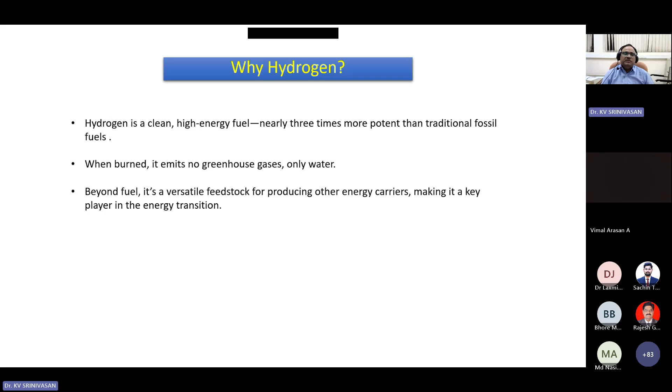But there is a catch. What is that? Hydrogen is abundant in the universe. It's the first element that came out after the Big Bang. And in fact, in any star, approximately 75% of the mass would be hydrogen, and it is found in every star in the universe.

However, the catch is that on Earth, hydrogen isn't available freely, not as hydrogen. It always gets bonded with some other element, most commonly moisture or water as H2O, or even hydrocarbons. So it is not in a pure form, it is always in a combined form. In order to use it as a fuel, since hydrogen is very rich in energy content, we need to break the bond to separate hydrogen from either H2O or the hydrocarbon.

And of course, if you want to break the bond, you always need some energy. You have to put in some energy to get that hydrogen bond broken so that you can separate hydrogen out of it. This is exactly the main point you should remember, and it is going to be the starting point of our future lectures. So it is not available in a free form, it's always bonded with some other element, and we need to break it, for which we need energy.

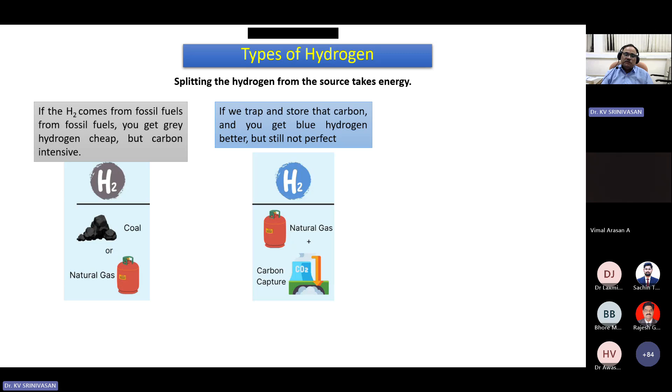Now, if I want to have high purity hydrogen, there are a few renewable energy sources, whether it's solar energy or electrolysis, where you get very high purity, what you call green hydrogen. So the topic is how to get hydrogen in green form or high purity form, so that the operation or usage of hydrogen becomes very, very easier.

Now, just for understanding, when it is said that hydrogen has a carbon content, what does it really mean? For example, if you start from natural gas, when you produce 1 kg of hydrogen, it comes along with 9 kg of CO2. The carbon intensity is quite high. Through various processes, we produce 9 kg of CO2 per 1 kg of hydrogen.

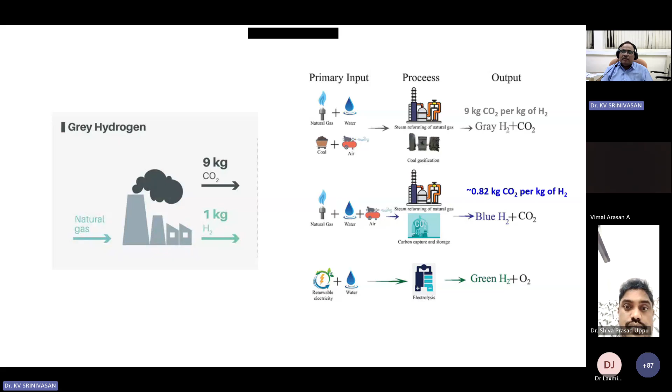So we call it gray hydrogen, which has very high content of carbon dioxide. Now we go for blue hydrogen, where a carbon capture methodology is used, so most of this carbon dioxide gets absorbed or removed, but it still has about 0.8 kg of CO2 per kg of hydrogen produced. And then of course, green hydrogen has obviously about 99, or better than 99.7 purity. So this is the whole objective.

You may also wonder, it doesn't stop with gray, blue, or green — several other colors exist too. I'm not going to spend time on that. Basically, you get varying purity between blue or gray depending on the methodology used to produce it. For example, methane pyrolysis gives you turquoise hydrogen. Coal gasification gives you brown hydrogen. So these are all colors describing how much carbon content there is and by which process you got that source of hydrogen.

So this is what we think, but the sum and substance is what is the cost involved in achieving higher purity. Without that, it's not going to be of much use to us. The current technology we have to produce high purity or green hydrogen — the cost per kg is still not comparable to traditional fuel.

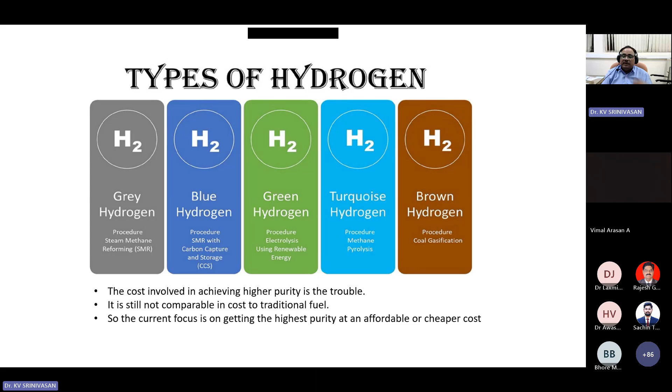If you are making an energy source or vehicle running on hydrogen, and the cost is many folds higher than petrol, obviously people will not move towards green hydrogen unless the cost becomes comparable. So the current focus is to get very high purity at an affordable, cheaper cost. Let's see in further slides to get a feel of what we mean by this cost and purity.

India's renewable energy capacity in the last 10 years has grown threefold, from 77.37 gigawatts to about 220-230 gigawatts in 2025, over a decade. This is going to further increase as we move towards more automatic vehicles or other processes shifting in that direction, requiring more energy. So the point is to reduce carbon content, since you can't stop energy consumption — it will keep going higher and higher.

The challenge is to make green hydrogen much more affordable. The current cost is about $4 per kg. The methodology or process — the whole world is trying to bring it below $2, which is equivalent to our petrol cost of about 100 rupees per liter or so. But it's very challenging, so we will put some kind of in-between benchmark to compete globally.

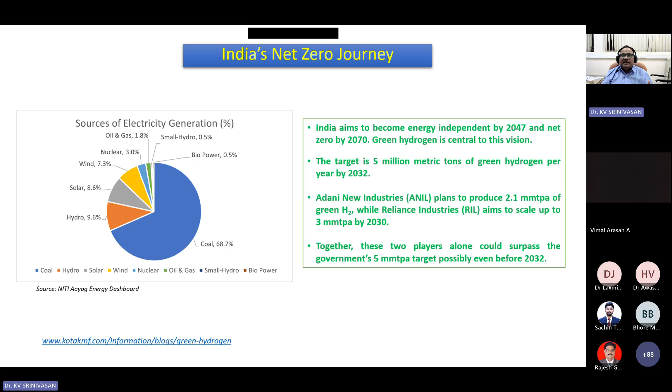So there are a lot of challenges, and how do we go about it? Now, when we look at various applications of green hydrogen, what is actually happening, existing, or proposed? In Germany, hydrogen-powered trains are already replacing diesel. The entire Tokyo Olympic Village was using green energy. Airbus is planning a zero-emission aircraft using hydrogen, and a British startup has already come up with a prototype flight powered by hydrogen.

Hydrogen-powered cars are already in the market. In the Indian perspective, we have pilot hydrogen buses already running, and we have a very large ambitious project of hydrogen-powered trains, which are ready to launch and have been successfully tested at ICF Chennai. It's going to be a very large, 12,000 HP powered train, which uses a different technology - we'll see that.

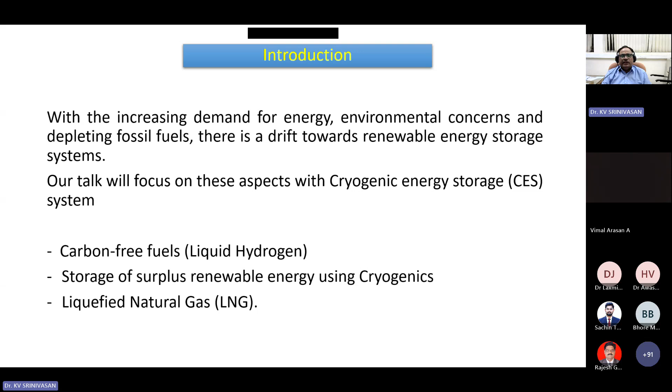I'm going to touch upon LNG because that's the starting point of the whole shift towards liquid hydrogen or green hydrogen. These are some of the things we are going to see.

Before I move to cryogenics, let's discuss temperature. Temperature can be measured in degrees Celsius or Fahrenheit, and there's also degree Rankine. But in cryogenics, we always use the Kelvin scale, which is an absolute version of Celsius. Whatever the degree Celsius is, you add 273.15 to get the Kelvin value. For example, 27 degrees Celsius is 300 K, which is a typical room temperature.

The conversion can happen between various units, from Kelvin to Celsius to Rankine or Fahrenheit. There's a conversion factor for this. In cryogenics, we always use the Kelvin scale for measurement.

Cryogenics deals with the production and effects of very low temperature. It's a very special subject that comes under both physics and engineering, hand in hand.

To emphasize cryogenics and the temperature scale, let's look at higher temperatures. We know that at 100 degrees Celsius water boils, at 0 degrees Celsius water freezes, and typical normal body temperature is 37 degrees Celsius.

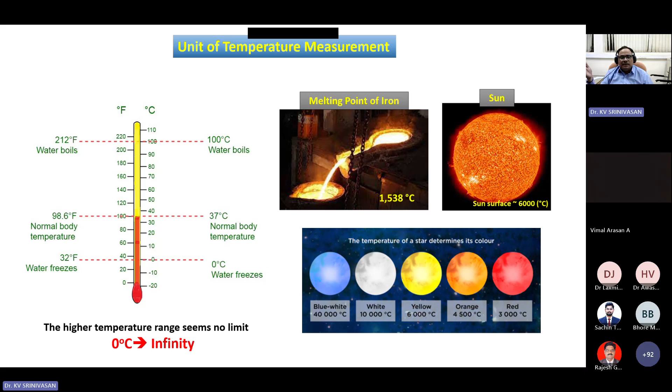There are certain stars whose temperatures are more than 40,000 degrees Celsius. Beyond a certain value, we measure temperature in terms of color rather than direct measurement. So starting from 0 degrees Celsius where water freezes, on the higher side it almost reaches infinity—there are stars with temperatures of 10 to the power 9 degrees Celsius. It's essentially an infinite scale on the higher end.

Now let's see what happens below 0 degrees Celsius. Starting from the freezing point of water and reducing temperature, it goes down to minus 273.15 and ceases—there is nothing below that. So on one side we see 0 to infinity on the higher end, and on the other end we get 0 to 273, which is very insignificant compared to the higher end. Yet a lot of property changes happen within this insignificant band of 273 K compared to infinite K.

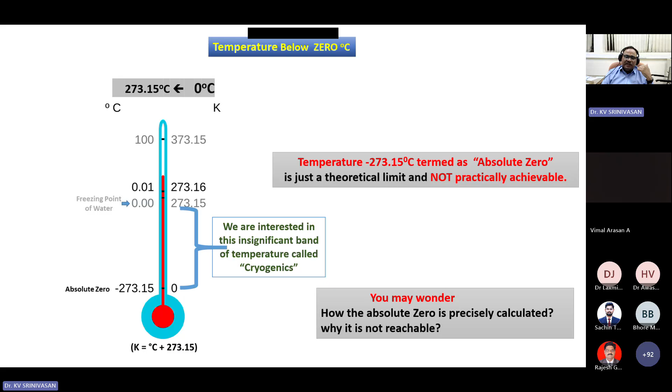We are interested in this insignificant band of temperature, which is what we call cryogenic. The absolute zero is the limit—nothing exists below that, and this is only a theoretical limit. In fact, you cannot practically achieve this temperature of minus 273. It has been very precisely found, but you can't go below it. So we may wonder, since it's been precisely found, why is it not reachable?

Let's go slightly into the physics to understand what's happening. We know various gas laws exist—Boyle's law, Charles' law, Avogadro's law, which we must have studied in thermodynamics. Charles' law says that V by T is constant: as temperature reduces, the volume of gas reduces. So as temperature keeps reducing, volume keeps reducing. If we simply extrapolate Charles' law, we see that the temperature scale reaches about minus 273.15—many digits have been precisely found for this. This is what we call absolute zero.

The reason why this is a theoretical limit and cannot be practically achieved is that when we are reducing the temperature of a gas, it becomes more and more dense. As the temperature keeps reducing to very, very low temperatures, we go to a quantum level, which is not a multi-element, it's a few atoms. So few atoms are cooled lower and lower, and at this temperature, assume you need one atom.

Even if one atom is cooled below a certain level, at this temperature we see that the molar volume becomes zero. So the volume of the gas becomes zero at this temperature, but we are cooling the gas or cooling an atom. So the molar volume of an atom has to be considered for your calculation. It cannot be ignored. So it's a very simple, provable reason: since the molar volume has to be taken into account, absolute zero is the theoretical limit and cannot be reached.

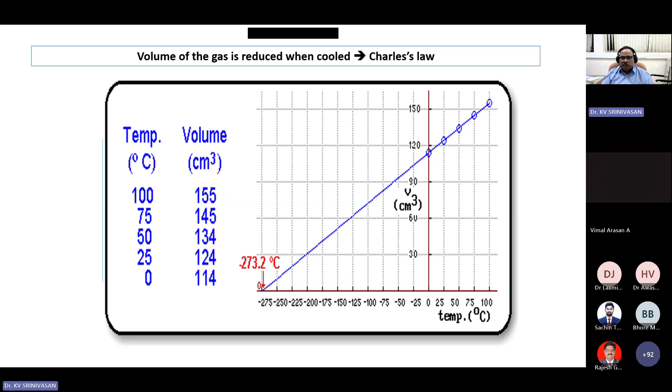People have tried to go as close as possible; 10 to the power of minus 12 Kelvin has been done, but of course that is with a few atoms of a particular material, so not below that. So this is a theoretical limit, we cannot go beyond it. Now we know the basic background of cryogenics. How do we achieve the cryogenic temperature?

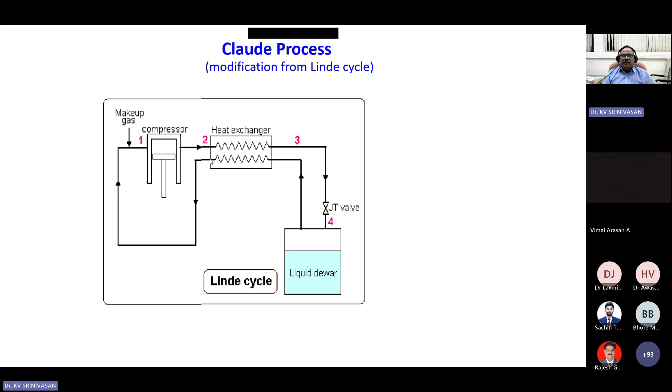The next cycle is the Claude cycle, which is a modification of the Linde cycle to increase the efficiency, because the Joule-Thomson expansion is an irreversible process. We know in thermodynamics that irreversible flow has very low efficiency. When talking about an operational plant, we have to consider the energy consumption or energy efficiency of the cycle. So we add an isentropic expansion process. The high pressure gas is expanded in an expander, and the low pressure, low temperature gas is put back to cool the incoming heat exchanger.

So we put multiple heat exchangers. The gas that comes here gets cooled by the expander, then further cooled by the evaporated gas, and finally liquefied. We may add more expanders, 1, 2, 3, and more heat exchangers, so that you reduce the temperature as much as possible, and the final Joule-Thomson expansion produces cooling. In this way all gases can be liquefied, and in fact all commercial cryogenic plants work with this combination of isentropic expansion and isenthalpic expansion for producing low temperature.

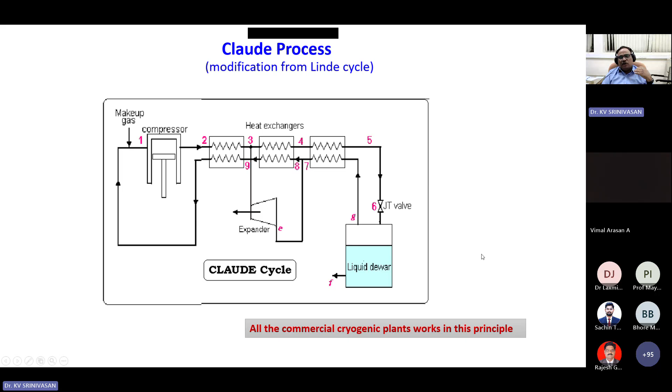Having known this, let us jump into our subject of liquid hydrogen, liquid air and liquefied natural gas. Liquid hydrogen is a cryogenic fluid because at atmospheric pressure its boiling point is minus 252 degrees Celsius, about 20 Kelvin. And its density is only 70 grams per liter, so a very, very light fluid.

If 1 liter of liquid hydrogen is allowed to evaporate at atmospheric pressure, it is equivalent to 848 liters of gas. So you see how much the density increases when you reduce the temperature. 1 liter of liquid will expand to 848 liters of hydrogen gas.

Same with air, which liquefies at minus 194 degrees Celsius, about 79 K. And this has a density of 870 grams per liter, roughly about water, which is 1000 grams per liter. It's almost close to water, a much denser fluid. And again, 1 liter of liquid air, when it evaporates, we get about 760 liters of gas.

So put it another way: if you have a 1 liter vessel and we put some liquid air or liquid hydrogen or whatever in it, when you close it and heat it from outside, the pressure builds up. Since it is not going out, the pressure build-up is going to be 760 times. So 1 liter of liquid air at atmospheric pressure, when you evaporate it by adding heat while the vessel is closed, the pressure of this vessel will go to 760 times the atmospheric pressure. So we said every cryogenic system is like a potential bomb, it's much worse than a bomb.

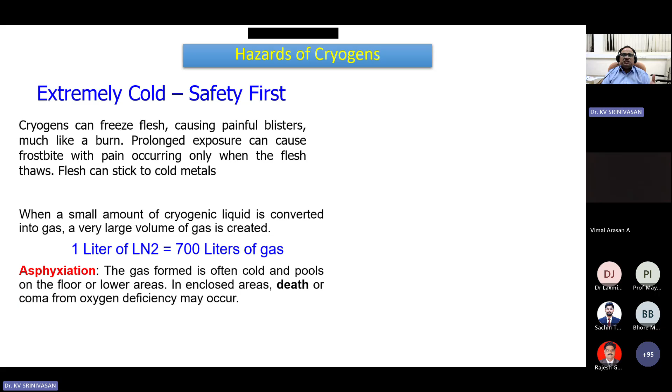So whenever we talk of cryogens or very low temperature, there is a safety concern to it. It's very cold. In fact, it's much worse than hot oil. It can freeze your flesh, freeze your skin, and prolonged contact with any of these cryogenic fluids will become a painful blister, because when the low temperature fluid comes in contact with your body, it locally numbs your sense nerves, and when it becomes warm after some time, it gives blisters.

And of course, when nitrogen or oxygen or hydrogen expands, it condenses the oxygen around, and then you feel a situation where you cannot breathe, because the oxygen in the atmosphere gets condensed by that very low temperature fluid whenever it is spilled out. So you have to be careful about how you quickly get that area cleared with fresh air. Of course, when you are handling it, you have to use a lot of personal protective equipment to save yourself and the persons who are working there. So that's the background of cryogenics and the cryogenic safety part.

Now coming back to our core subject of hydrogen as a fuel. Now we go in detail. When we say it is 3 times more powerful: petrol has an energy content of 44 megajoules per kilogram, whereas hydrogen has 120 megajoules. Okay, so it has a very high energy content. This can be used as a fuel for many applications, which we are going to see. The normal internal combustion engine can be converted into a hydrogen combustion engine, or you can use that hydrogen in a fuel cell and a fuel cell powered engine. Of course, the rocket is another special application. We stick to these things. And of course, we know that there's no harmful emission when you use hydrogen.

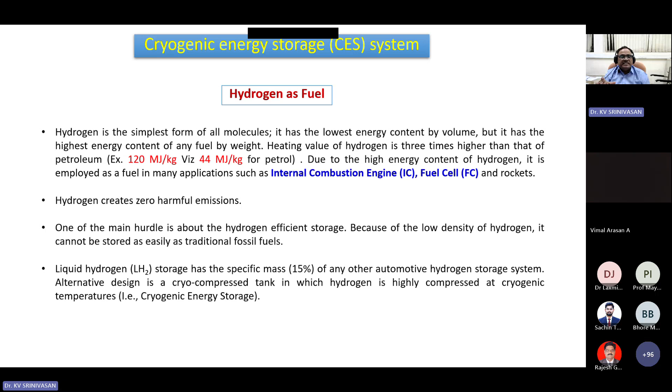If the pressure for compressing the gas is so high, it's very difficult, and liquid hydrogen is okay, but it's not much in specific mass. To combine these two, keep it in liquid hydrogen form and store it at a very high pressure, not as high as compressed gas. So the combination of high pressure cryogenic fluid is also one of the options for how we store the hydrogen, because that's very, very essential.

Over the production, how do we extract hydrogen? As you say, the simplest thing is natural gas, which is much cheaper and quickly we can get, because of the CNG gas. Along with that, gray hydrogen is possible, and is very cheap, but it's not as pure for certain things. And we also have hydrogen production from biomass gasification, which is a very promising area. Very high purity hydrogen is possible, but still it is not as high purity as green hydrogen; it is somewhere between the blue and turquoise.

So many of these challenges are happening: how do we increase the purity from waste biomass? Because in many city environments, the biomass collected can quickly become a plant for producing hydrogen, whereas CNG will have to be imported, or it's in the oil rig, so it's far off. So if hydrogen production comes within every city, biomass is a quick option.

And there are various other methodologies like ammonia, which has a high percent of hydrogen, again challenging in separating. In fact, cellulose-based sources can also be used for producing hydrogen, and from methane, various methodologies are there. Maybe the further speakers will cover them.

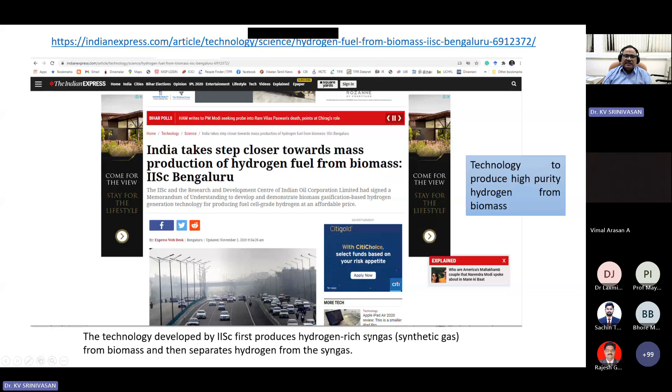So the technology to produce high purity hydrogen has already been seen. It's from 2020. The prototype models are now in process. So it converts biomass to somewhat blue hydrogen, then we make a hydrogen-rich synthetic gas, and pure hydrogen is separated from the synthetic gas. That is the technique.

The other very promising area, which is going to happen much faster, is the internal combustion engine. We already have all the fuel-powered engines available, normal internal combustion engines using gasoline, and diesel ones. So if I replace the fuel from gasoline to hydrogen, can I use it as an internal combustion engine? Yes, it is possible. Of course, slight modification has to happen, but we will see in the next slide what kind of changes can be done.

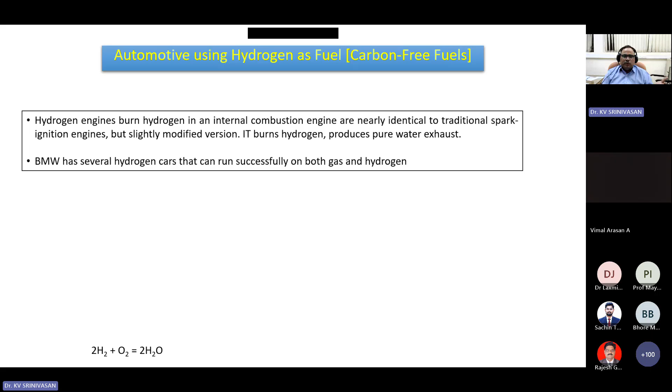Is there any possibility, without any change, just changing the carburetor supply from petrol to hydrogen, to produce power? Yes, it is possible. A hydrogen engine burns in internal combustion nearly identically to spark plug ignition, with slight modification. Let us see. It's a typical IC engine where gasoline comes in with a spark plug. Everything remains the same, and you change the fuel supply from gasoline to hydrogen, in terms of a high pressure gaseous hydrogen spray.

So hydrogen plus oxygen, which comes from the carburetor air, in the traditional way produces high combustion power that can be utilized to drive the piston, and the exhaust is H2O, a very green emission.

If you have that kind of system available, we can carry liquid hydrogen, high pressure gas hydrogen, or combined hydrogen gas with us, evaporate it, and connect it to the fuel line, like multi-point fuel injection. Everything remains the same, just change from the petrol tank to the hydrogen tank and things are done. How is this possible? It's a simple diagram.

So basically, when you are using gasoline vapor, we know that the opening of the inlet and exhaust valves is based on the valve timing diagram. People who know automobile engineering will know about the valve timing diagram, the sequence of which valve opens, whether the inlet is open, exhaust is open, or both are closed.

So assume a typical petrol powered engine of roughly 1000 cc, 983 cc total. If we put about 10% fuel and 90% air and combust it, we'll get about 3.5 kilojoules of combustion power, which will drive the vehicle. For a moment, we take that 3.5 as 100%.

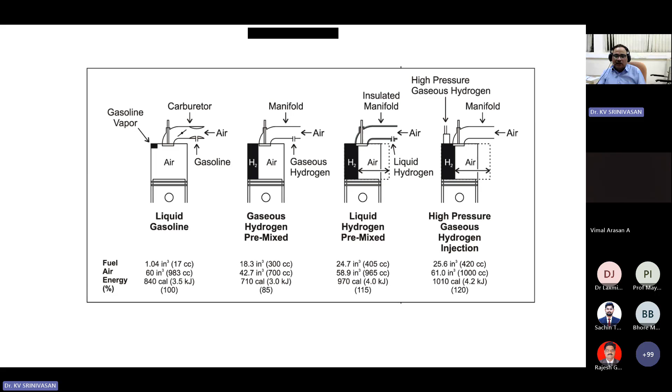This is what is happening, and people are quickly changing. If we know the diagram, by changing the valve timing diagram we can change existing powered vehicles. This is what Godrej and Tata are doing. So this is one very promising area which can quickly take off the moment we get high purity hydrogen. For all changes, you need high purity hydrogen.

So getting hydrogen is the main hurdle rather than the solution. Reasonably good solutions are already available, but we are stuck with high purity at affordable cost. That you should remember.

Now we go to the next type of vehicle, the fuel cell based vehicle, which we can also quickly change over to. India in principle has decided from 2030 not to produce any petrol or diesel powered engines. I don't have a reference, this is what I heard and understood, so please cross check, don't take it as certain.

So from 2030 no more petrol and diesel engines are going to be produced. So we should go for electric-based vehicles, which are already in the market. You just go in full swing.

Now at the same time, the hydrogen fuel cell is also coming up. If hydrogen becomes more affordable, what do we do with the electric vehicles? So this combination of electric and hydrogen is the hybrid. This is going to be the future very soon. So how the hydrogen fuel cell works, many experts are going to say in further talks. I'll just give some overview.

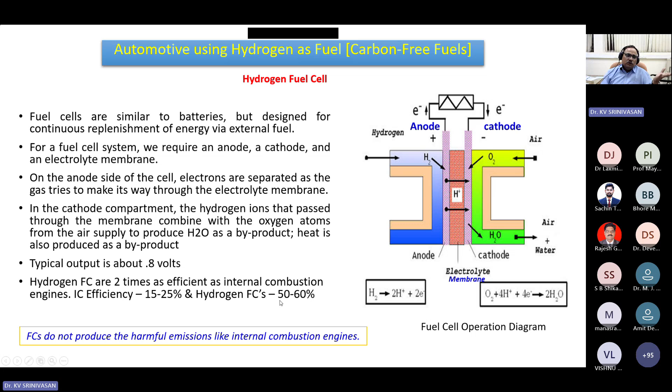Okay. Now, this fuel cell based vehicle cannot have enough voltage from one cell. So the challenge is to have the proper voltage to run a vehicle. You add a stack of fuel cells, and there's a centralized path where fuel goes in to all the cells, and the air comes in from the other chamber to all of them, and each cell produces electrical current. You take it out combined.

Okay. So now about the membrane, of course, I'm not going to say much about it. Many fuel cell people are going to mention that. Different types of membranes are available, alkaline-based or the proton exchange membrane, which is like a polymer. These technologies are much more advanced, while everything else remains the same. Whether you get the best output, whether after some point of time the membrane has to be changed, how quickly you can produce this electron voltage, or how long it can stay intact, these are the challenges.

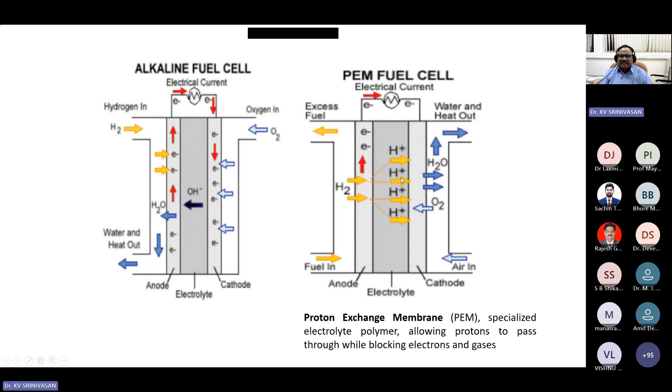There are many types of fuel cells available. I just show them for the sake of it, I'm not going to spend time on that. What is the typical storage technology you use? Conventionally, you can store it as a liquid or as a compressed gas. Then it's not only there.

If it becomes very low temperature, it's not possible. If it is very high pressure, it's not possible. Then you also have a solid state material where hydrogen, like a sponge, when hydrogen comes in, all the hydrogen gets absorbed in the sponge and it can release as and when required. So the storage technology can be of many modes. It's not only traditional liquid or gas, it can also be a solid state material, various materials at low temperature. This can happen at room temperature, at a very elevated condition, or at higher temperature it can happen at low temperature. So all combinations possibly exist.

Speakers will mention about that.

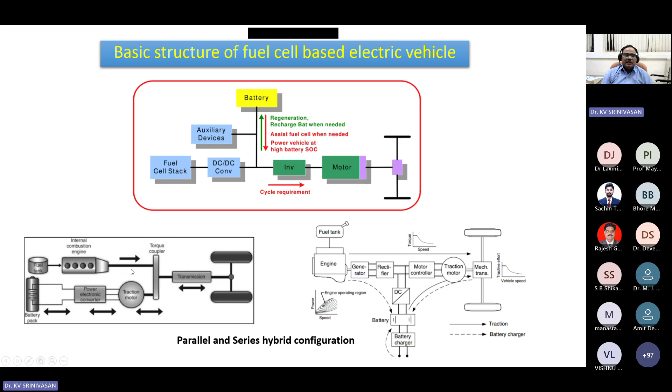So whenever there is a fuel cell, the hydrogen problem is sorted out. All hydrogen electric vehicles, by adding this fuel cell based portion, can go directly into a hybrid vehicle. This is what is going to happen in future.

So in a typical fuel cell vehicle, you need to have electrical propulsion, which is a known thing. You need to have fuel cell technology and hydrogen storage. As of now, looking at hydrogen fuel cell based vehicles, of course the batteries are still there, so the battery can be charged externally or from here, so conversion becomes easier.

I was mentioning about the challenges in hydrogen storage. I was talking about high pressure. When you're looking at highly compressed hydrogen gas, you should compress from 35 megapascal to 70 megapascal, sometimes 350 to 700 atmospheric pressure. Huge pressure, unimaginably high at room temperature. If you want to make such high pressure, typically you must have seen the LPG gas cylinder at home, it's about 3.5 atmospheric pressure. If you go to a gaseous cylinder in the laboratory, you may get about 150 to 200 bar. But 350 to 700 bar at room temperature is very high.

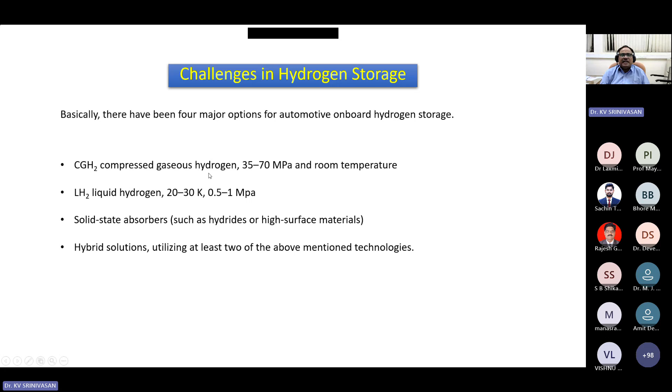Of course, if you want to go with liquid hydrogen, you can go to about 10 bar. Then you can have a hybrid solution of high pressure and low temperature, and the high pressure combination will take care of these things. So both options are available for the tank pressure.

So we are already making, there are market available composite fiber based wrapped cylinders. It's not a typical metal cylinder. A metal wire mesh over the carbon fiber, many such layers, such construction. We make the thing. Compressed hydrogen goes up to 340 to 700 bar.

For example, if you have typically about 186 liter water volume capacity, and store it with about 340 bar of hydrogen gas at room atmospheric ambient temperature, we can have about a 500-kilometer range with a fuel cell based vehicle. So it's not just about the 500-kilometer range, it's about how safe we can do it, how quickly. When you have the storage, how do you test it, how do you ensure it is leak tight, because it's going to sit in a vehicle, which is a very safety concern for the people traveling with that. If anything is to happen, how do we take care of this? So this has to be addressed.

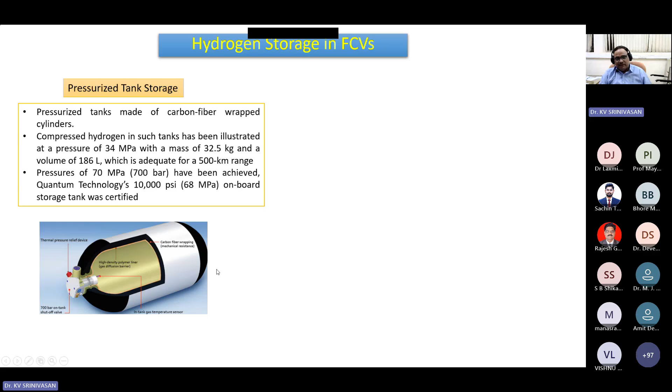Now if we want to have a liquid cryogenic based tank, we don't need to have as much pressure, because we can go slightly higher pressure, still affordable, and still match this requirement with a cryogenic fluid. So maintaining liquid hydrogen becomes very explosive when it comes in contact with oxygen or similar substances.

When you have a liquid hydrogen tank, before filling you have to be extremely cautious to clean the cylinder, purge the cylinder with so many gases before refilling. All the pipeline which is connected should not be exposed. So these are the challenges which we need to address.

Of course, these have all been well proven and already done. For example, a tank has a multi-layer insulated design with many layers of radiation shielding to reduce the boil off of the hydrogen at high pressure. Then liquid hydrogen is poured here, and you take the hydrogen or liquid hydrogen or hydrogen gas, depending upon the technology being used.

And how do you make the cylinder, how do you fix it so that the wall manifolds are accessible and the filling holes are at the front? When you make the filling holes, the valve and other connections should be standardized so that the location where you refill has the matching adapter, which is already been done.

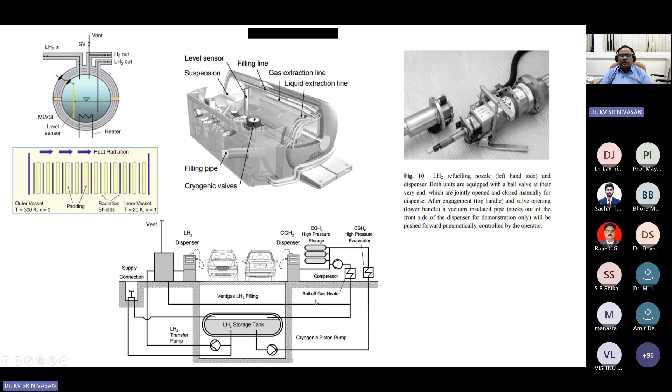Like you have a petrol pump, with a liquid hydrogen pump it pushes the liquid through the vessel and dispenser and gets stored into the system. In case some gases use only compressed gas, you take the gas, compress the liquid, evaporate, compress, and put it back. So whether it's liquid or gas, all the things are possible.

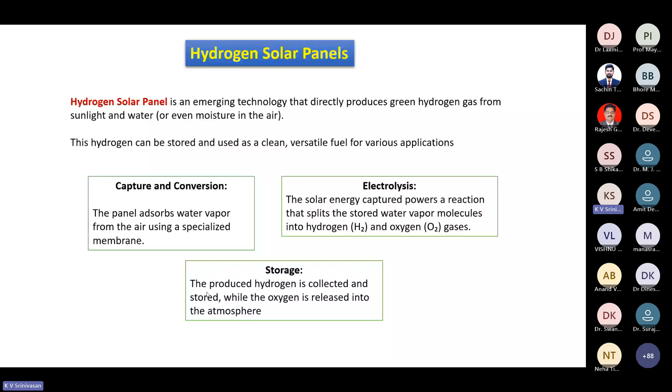The panel will adsorb water vapor from the air using a specialized membrane at night, then do the electrolysis process, splitting the water molecule into hydrogen and oxygen. Both hydrogen and oxygen can be used separately, captured and stored, or the oxygen can be released into the atmosphere. All these combinations are possible to produce clean green hydrogen using an existing photovoltaic cell.

There are two separate methods. One is photovoltaic electrochemical water splitting, which generates electrolysis as I explained. The other is photo-electrochemical cells, which use photocatalysis, where the solar cell itself has a special membrane that, when exposed to sunlight directly, triggers a chemical reaction, splitting the stored water molecules to release energy.

Basically, like a water sponge, it collects water molecules at night, and during the daytime it gives out the photoelectric current. Whatever current is produced from the normal solar cell will be used for producing hydrogen in addition to normal power. So these are two separate processes, and both are upcoming, with some already installed.

Each panel can produce up to 12 kgs of hydrogen, depending on the size. For a typical standard panel size of 2 feet by 6 feet, this will give 12 kgs of hydrogen in addition to the electrical power.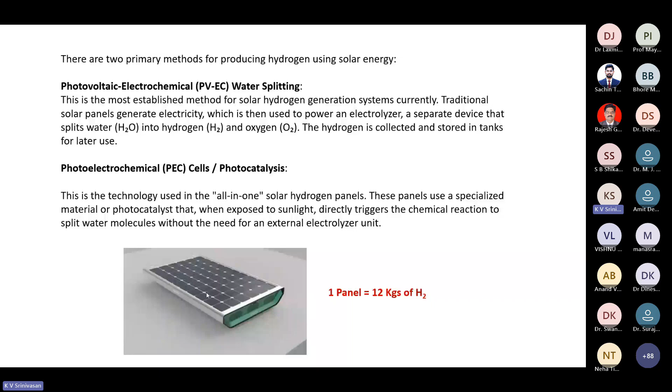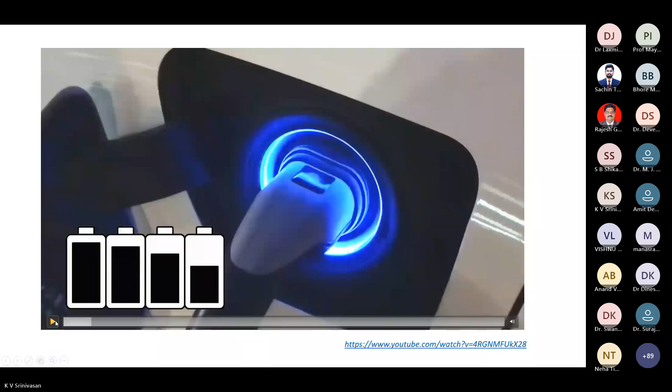Okay, so I have a small video about that. Can you hear the sound also? Sir, we can see the video but not the sound. No? Okay, then I will tell them. Is it audible now? Okay, just watch the video, pause it.

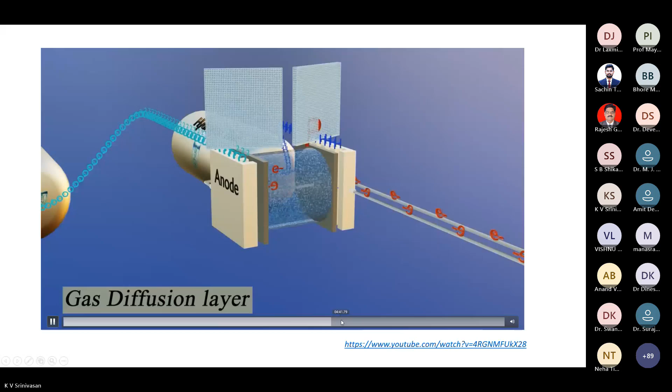Sir, right now we can't hear the audio. Okay, some of the things are written, I can use that. You can move ahead, and at the end of the session probably you can see it.

So now going back to the basic substance in the video: you have the material which can absorb moisture, and with the electrolysis process, for which you need power stored during the daytime, it is used for separating the hydrogen. So basically the combination of the electrolysis process and the solar cell is what this hydrogen solar cell is.

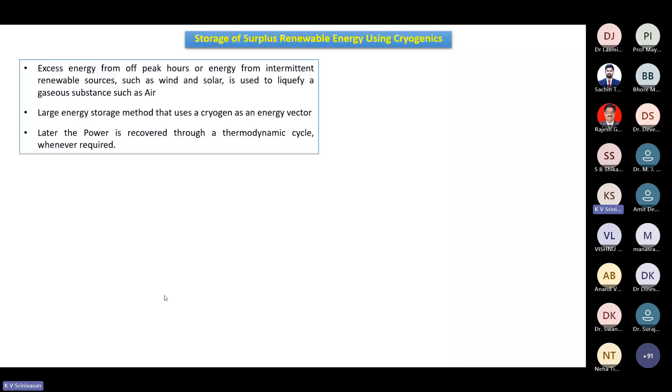Now coming back to surplus energy release, moving a bit away from hydrogen, but it's also very clean energy. We have a lot of windmills, thermal power plants, nuclear power plants. Once you start these plants, it's very difficult to stop them, and it takes a lot of precaution to do that.

So when there is a change in the requirement pattern of electrical power, for example in the winter season, consumption reduces a bit here in India, but the windmills and thermal power plants still have to keep running.

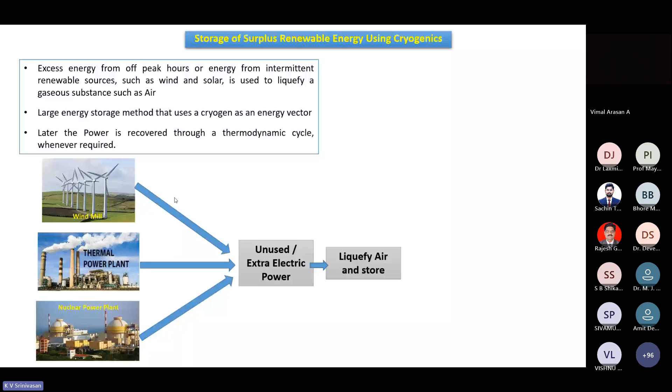But if there is a mechanism to use that atmospheric air in a liquid form and store it in the liquid form, and then whenever it is required, when the load is getting higher, you use the liquid air, evaporate the liquid air, and we have already seen 1 liter of liquid air will go to 760 times the gaseous content. So this high pressure gas will run the turbine the way it does in a thermal power plant or nuclear power plant where the steam is running.

In the same place, instead of steam, that high pressure nitrogen will run the turbine and the electric current can be produced. So whatever electrical power has been unused from the extra sources gets captured in a liquid form and reused whenever the demand is more. So this process of charging, storing, and discharging is what we call a liquid air energy storage system, LAES.

So it means that if we store it and then reuse it, we can get up to even 65 to 75% of the power which otherwise would have gone waste because it has been unutilized. So with a round trip efficiency of even 65 to 75%, you can keep that high pressure store.

So I have a small video where a small bottle is filled with liquid nitrogen. We have made some nozzles tangentially. Again, don't worry about the sound. Just see that thing.

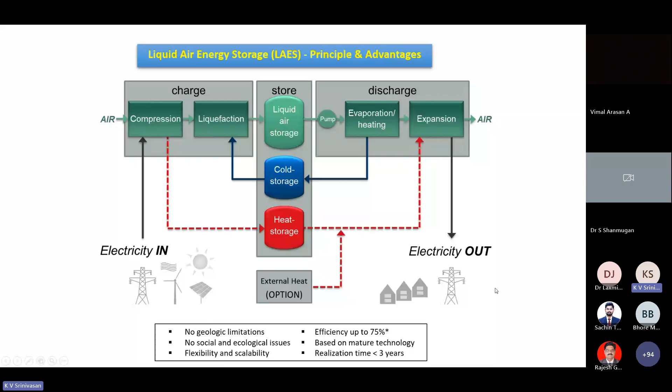So where you can put this: whenever oxygen and nitrogen are separated, you can store the nitrogen, or oxygen can be used for the combustion process. Nitrogen can go into fertilizer projects. When there is a nuclear power plant, excess electricity can be used to liquefy the air, and then the liquid nitrogen industry. So these are various areas where you can do it.

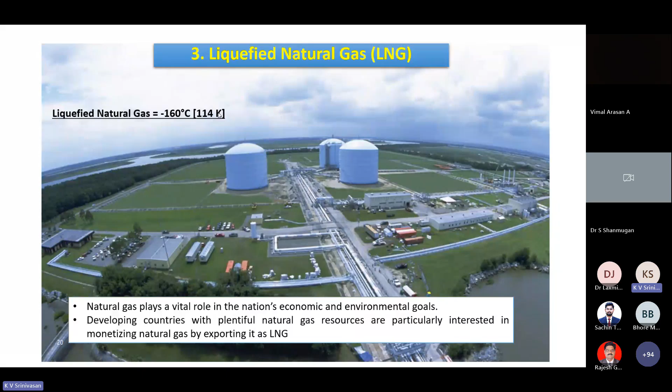So I come to the final part of my talk. It's liquefied natural gas, which we know is liquefied at 114 K, minus 160 degrees Celsius. So this is one of the areas where you can work. We'll see in the Asian scenario why liquefied natural gas is used, because compared to fossil fuel it's reasonably better, the CNG or LNG gases.

Okay, so India is the fourth largest gas consumer in terms of LNG, and we are importing a very large amount, and energy consumption keeps increasing by 6 to 7%.

Government is increasing the energy consumption because the alternative to fossil fuel, the next reasonably better choice, is this one. Despite this, we have to import gas, and we have to import it in large quantities. So we need to have pipelines developing into a national grid, which we are going to see here.

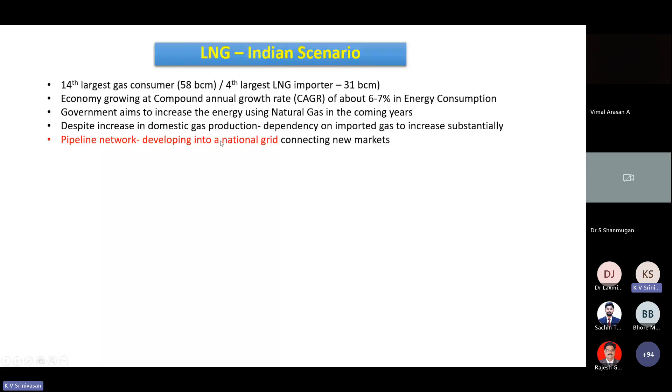So we see that for the last 10 years it has gone up tremendously, about twofold, in terms of LNG consumption, and we want it to grow 6 to 7% every year. It is increasing largely. So how do we do it?

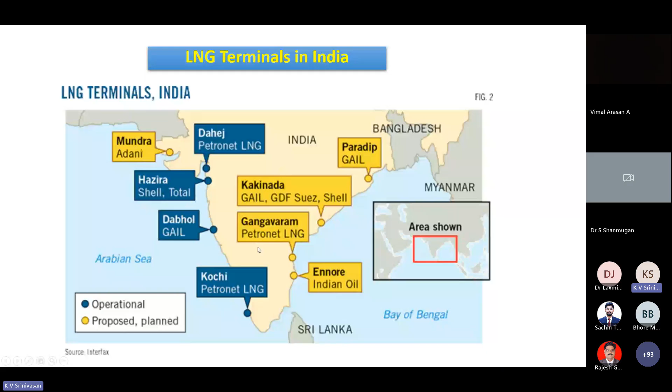How do you do this? India has come up with a better choice: the filling stations and import requirements are here, and you lay large pipelines throughout India, so whatever is imported is transferred through them instead of road transport. We have an existing 16,000 kilometers already available, and we want to increase that by another 100% within a few years, and 8,000 are already under construction.

When there is large storage, it keeps on evaporating. So we use a cryogenic application to re-liquefy the boil-off gases, so that the temperature is maintained lower and the boil-off is reduced. Otherwise, you have to vent it and throw it out. By using cryogenics to recool, or for regasification, we can save a lot. So 15-25% of the cost in the whole process can be reduced.

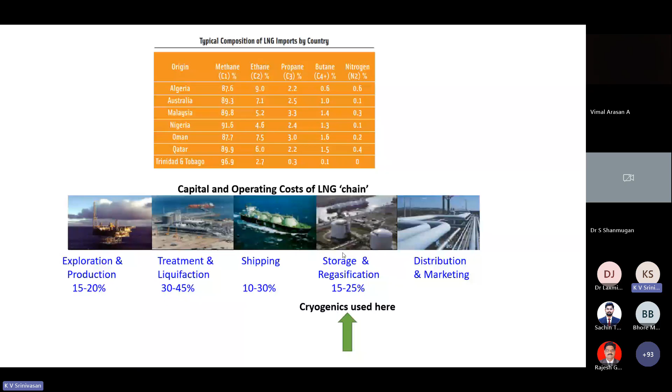An actual application of LNG is ship-to-ship transfer. LNG comes offshore and you transfer it from ship to ship; transfer from jetty to ship is also possible. We have a boil-off of 0.15% per day, which goes to the atmosphere, and which is re-liquefied using cryogenics. A lot of cryogenic coolers and refrigerators are available to recool it and avoid wastage, because 0.15% of a large volume is quite substantial.

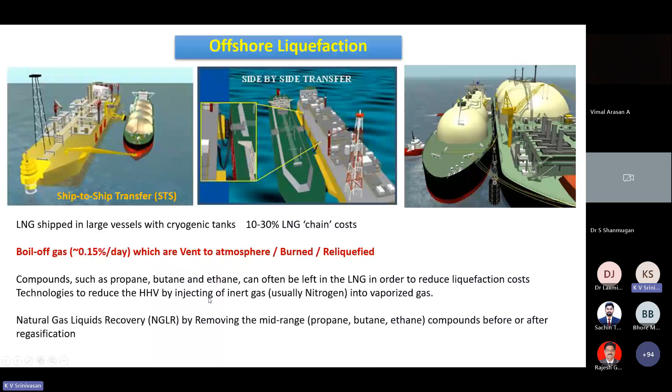Then we have a lot of terminals. Whenever the ship comes here, we have laid the pipeline; these are actual photographs of what we have been using in various locations. The marine engine, which uses a large quantity of diesel, is now switched over to LNG. We have LNG-powered engines where we store the LNG in the ship, and similar systems in rail locomotives, which are already in place.

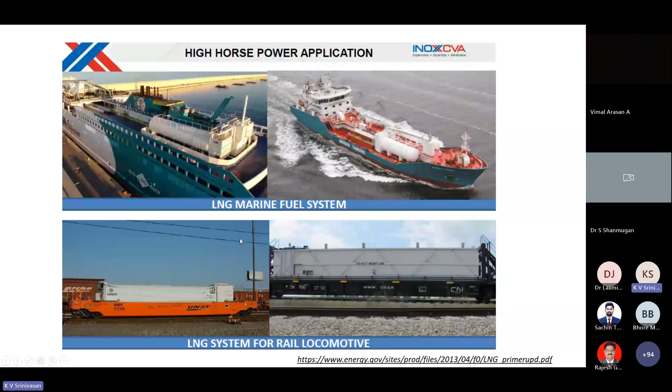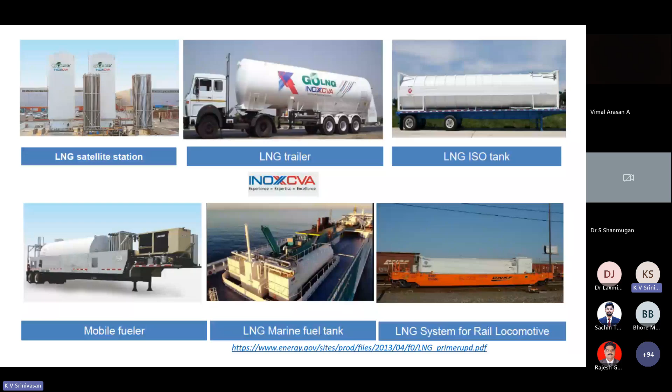These are the LNG facilities at various locations, from the coast to the shore, where it gets stored and transported. For example, this one is from a large jetty. You have a pipeline to the shore where it gets loaded, and truck offloading or filling is done from here. Many options are available, like local storage at ground level or road level. A lot of this is already in place in India, including for local vehicles, not only local buses.

If I want to go to LNG, we need to have a large filling station every now and then, so that we don't need to run around for LNG for refilling option. So, I mean, a lot of things are happening. At every 250 kilometers, they used to have a filling station. Like, the major truck movement routes are being identified, and these routes are being developed with a large filling

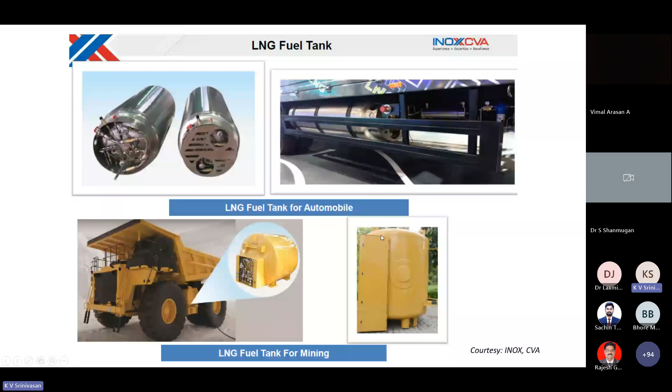system, and Inox CVA, one of the people who work within manufacturing and fabricating large cryogenic tanks and storage applications, also came up with all these things. Like in a truck, if you want to have LNG, these are the vessels you can store it in and connect, and from the filling station, everything can be done. So this is overall about the whole LNG as a fuel. And I come to the end of my lecture, and thank you very much.

Thank you very much, sir, for your session. As you have included physics, chemistry, chemical engineering, refrigeration and air conditioning, cryogenics, energy engineering, and hydrogen, this is a very nice session and presentation also.

Okay. I will ask the audience for any questions. Please give access to all the audience. Can you just stop my screen? I could not stop the screen. Okay, just a minute, sir. Stop the sharing, please. Sir, you need to stop from your side only. Okay, you can stop. Hello. Yes, sir. Now, audience, Dr. Dinesh Kumar, if you have any doubts or questions related to the session, you are free to ask. Yes, sir, go ahead.

Good evening, sir. Hydrogen fuel is highly flammable and it is very dangerous to use in automobiles. So, in place of that, can we use DMFC, that is, direct methanol fuel cell? See, the safety part is there in all places. Even the petrol engine also has the same problem. But if it is in a cryogenic form, it is not explosive.

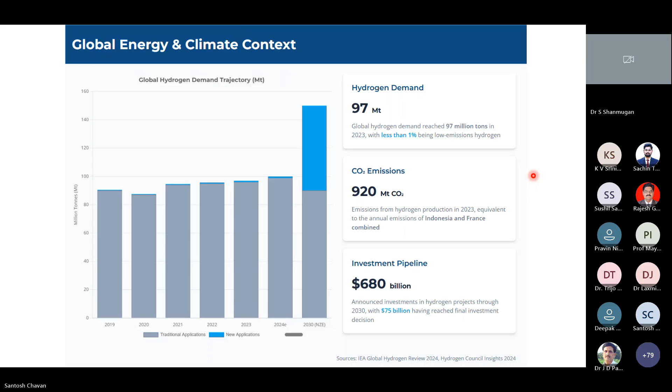So let's understand why green hydrogen and why now, why we are talking about green hydrogen now. So what is the need? The need is definitely to save the climate, to reduce carbon footprint, and to make our energy generation with zero carbon footprint. There are different reasons, and global situations like climatic changes, global warming, all these climatic conditions indirectly pushing us to move towards renewable or green energy sources.

So when considering green hydrogen utilization, the major consumers are steel manufacturing companies, chemical manufacturing, then shipping, aviation, which require molecular solutions where direct electrification isn't feasible. Then renewable integration, which enables high variable renewable energy penetration through electrolysis, load flexibility, and utilization of curtailed power.

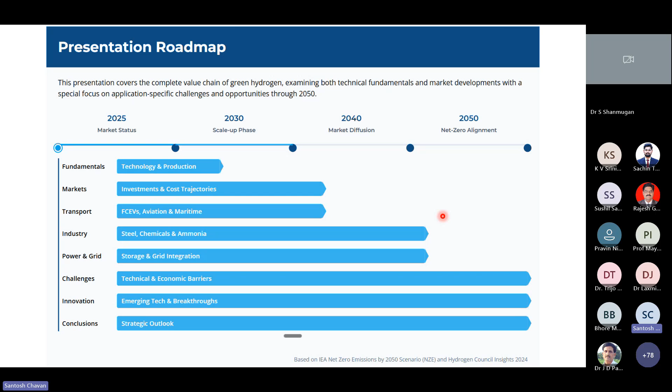Then the third stage, around 2040, the market will grow, where the major applications will be fuel cell electric vehicles, aviation, maritime, then steel, chemical and ammonia industries, then storage and grid integration. So by 2050, it is expected to achieve net zero carbon footprint energy generation or hydrogen production.

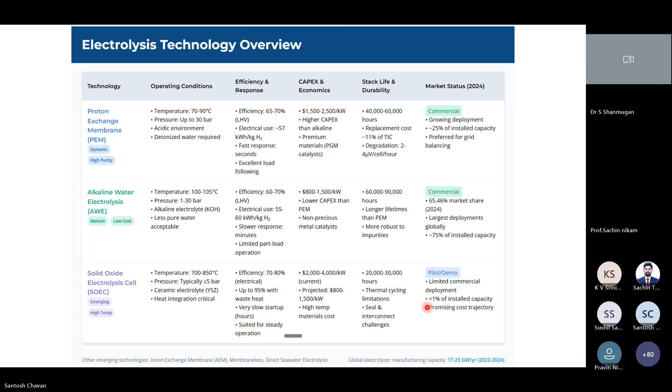So, PEM electrolyzer specs and efficiency in brief, I will not go into that much detail. In a simple proton exchange membrane electrolyzer, water enters and electricity is applied through the proton exchange membrane, and water gets split into hydrogen and oxygen.

This has very good dynamic response, high purity, compact design, and is scalable. Electrical efficiency is around 57 kilowatt hours of electricity consumed to produce 1 kg of hydrogen, and the levelized cost of hydrogen, LCOH, is $5 to $7 per kg. LCOH means the cost of hydrogen production per kg throughout the project, not only the initial stage, because the production cost may vary throughout the project. So the total cost of hydrogen production per kg over the project is called levelized cost of hydrogen, LCOH, around $5 to $7 per kg.

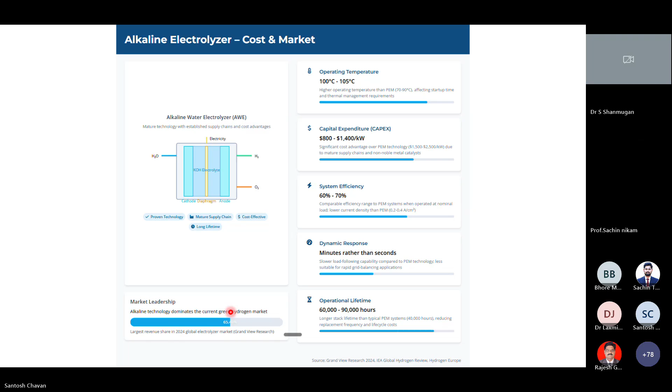Then SOEC, already discussed, 70 to 80% efficiency with heat generation and heat integration, maintaining 700 to 850 degrees centigrade. Technology readiness level is 6 to 7, that is pilot or demonstration. Technology readiness level is divided into numbers from 1 to 9, where 1 represents initial concept and design level, and 8 and 9 represent final full commercialization. So it is in between the initial beginning phase and the final commercial phase, at 6 to 7.

Stack durability already discussed. Path to lower LCOH, the cost of hydrogen production is expected to be $3.5 to $5 per kg. Key advantages are highest electrical efficiency, potential for all electrolysis technology, and can utilize waste heat from industrial processes like steel, glass, cement.

This is the unique feature of this system. If heat is readily available from other primary applications like steel manufacturing, where iron has to be melted above 1500 degrees centigrade, after melting the iron, the waste heat is rejected to the atmosphere or recycled. Besides that, the same heat energy available in the source can be utilized here. Glass manufacturing and cement manufacturing companies also need bigger boilers to maintain or supply heat for their process. So if those heat sources are already available, they can be used, and this will be most efficient for those applications.

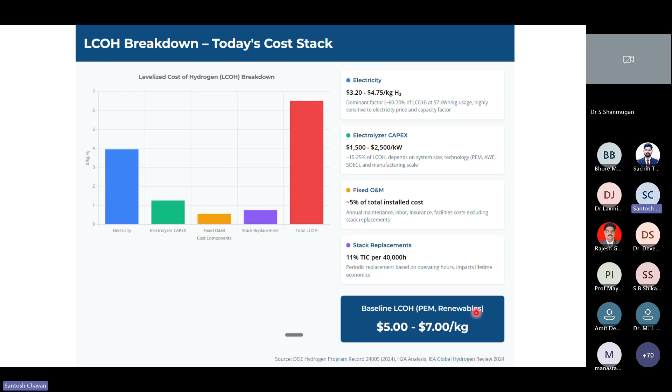Now, technological readiness and deployment plan. Alkaline water electrolysis, AWE, technology readiness is already around 8 to 9. It is mature technology with decades of industrial deployment. It's already installed everywhere, and readily adaptable technologies are available. Its efficiency is 60 to 70%, with lower current density than PEM. It dominates the market share, almost 65% captured. It has lower capex required than PEM, and an established supply chain - raw material supplier, electrolysis supplier, and all part supply chains are established. So there's no need to search for new sources or suppliers to get connected for supply. But it has limited dynamic operation.

Proton exchange membrane, PEM, its readiness phase is also almost equivalent to AWE. Commercial deployment scaling is rapidly growing. Its efficiency is 65 to 70%, with rapid dynamic response. It is compact in design, with stack replacement at 40,000 hours.

Solid oxide electrolysis is around halfway - still this technology has to evolve. It will take bit of time to get matured, and should be available in the upcoming 3 to 5 years. High temperature source is required, superior electrical efficiency, durability, and challenges being addressed. Industrial waste heat integration potential - wherever industrial waste heat is available, this technology will be more suitable.

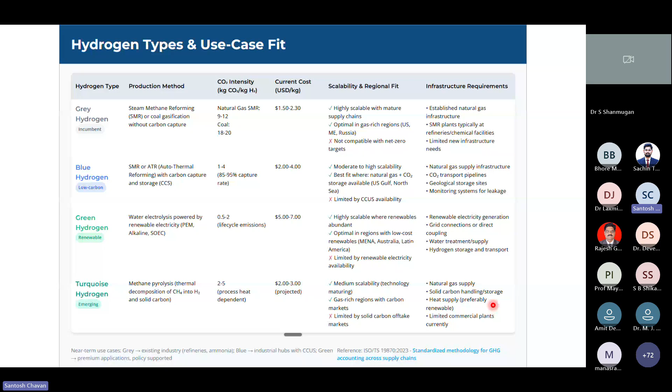So from methane pyrolysis, the new technology, this has medium scalability, targeting the gas-rich regions with carbon markets. It's limited by solid carbon offtake markets, natural gas supply, solid carbon handling and storage, and heat supply preferably from renewable sources. It has limited commercial plants currently.

How this green hydrogen production technology will take off, how it will move forward.

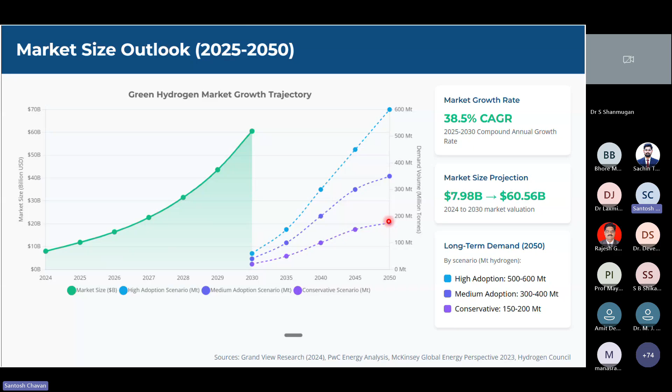Long-term demand by 2050, in scenarios of million tons of hydrogen: high adoption will be 500 to 600 million tons. Medium adoption will be around 300 to 400 million tons. For conservative growth, if it's growing less than expected, it will still generate 150 to 200 million tons of hydrogen.

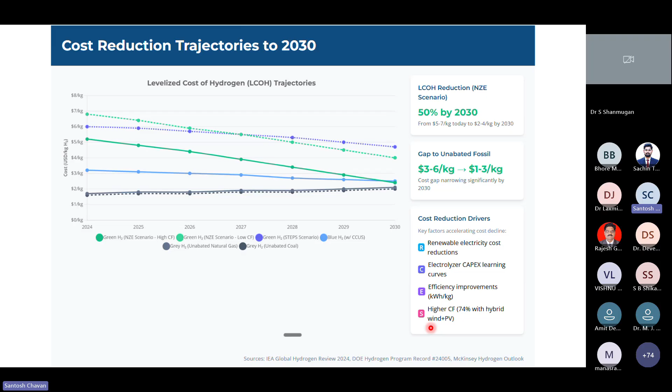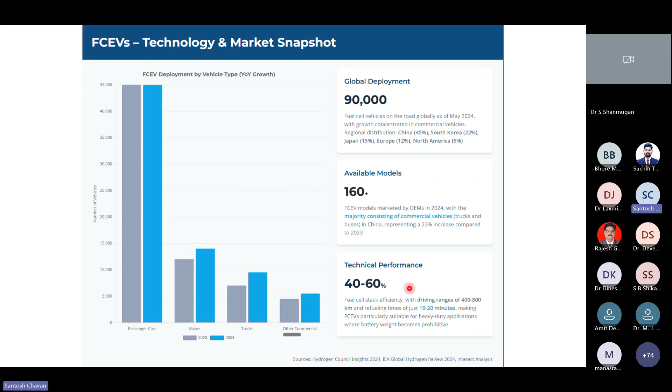So the total cost of ownership compared to the factor. So total cost of ownership is the total cost of the vehicle when it is operated for a certain fixed interval of time. So if you buy the petrol vehicle and use it for 5 years, and if you purchase a hydrogen fuel cell vehicle and use it for 5 years, then what will be the total cost? It comes with fuel refilling, maintenance, repair, rework, and all other points will be considered.

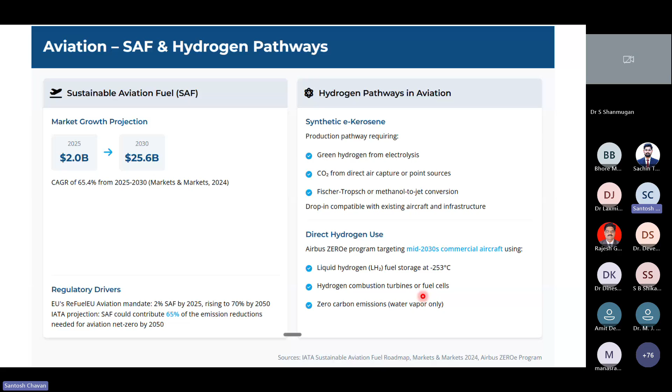So aviation application. So sustainable aviation fuel. SAF market growth is from 2 billion to 25 billion by 2030. It is almost 65% of market growth. So the hydrogen pathway in aviation is synthetic e-kerosene; the production pathway requires green hydrogen from electrolysis, CO2 from direct air capture or point source, Fischer-Tropsch or methanol to jet conversion, drop-in compatible with existing aircraft and infrastructure. So direct hydrogen use makes it an advantageous technology compared to the old one. The liquid hydrogen fuel storage is at minus 253. Hydrogen combustion turbines or fuel cells are used. Zero carbon emissions are advantageous.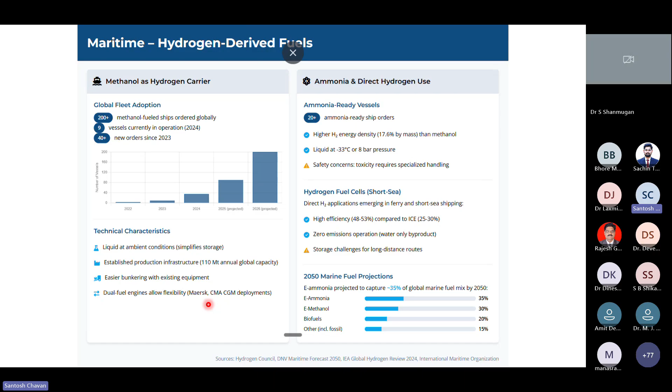So mobility market penetration forecast can be visualized here. See heavy duty trucks; these hydrogen fuel cells are used in heavy trucks majorly.

Almost 65% is contributed by heavy trucks. Second option is buses. Because of its storage tank capacity and ruggedness, only heavy vehicles are more suitable. Passenger cars are also using this, but if you increase the storage tank ruggedness, because hydrogen we have to store at high pressure, thicker or very strong material has to be used. Because of that, the weight of the vehicle will increase and the efficiency will get reduced. So passenger cars based on fuel cells will be a lower number, we can see.

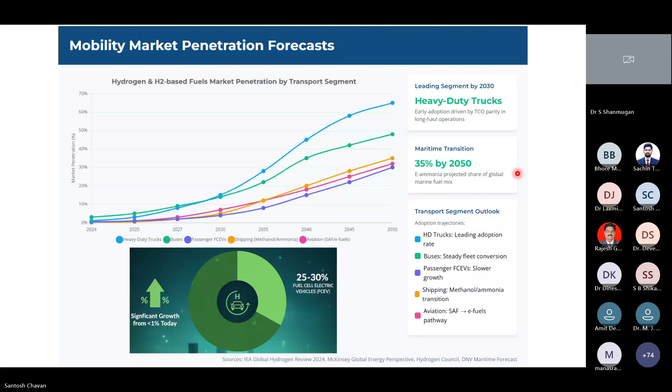So steel decarbonization. In the steel industry, how is the hydrogen utilization distributed? Like India, 49.3 million ton, Iran, 33 million ton, Russia, 7.8 million ton, Saudi Arabia, 6.7 million ton, Egypt, 6.4, other countries, 32 million ton. This is DRI production, that is direct reduced iron.

Annual global direct reduced iron production in 2023 represents around a 6.5% increase from the previous record. But the production method is 68.5% gas based. So natural gas based direct reduced iron production with low carbon dioxide emission counts for 68.5% of production, while the remaining 31% is coal-based with higher carbon intensity. So decarbonization potential of less than 0.5 ton of CO2 per ton of steel.

So hydrogen DRI projects pipeline in major different countries, which are the projects and what capacity is already running. Like in China, capacity 0.6 million ton per year is planned. Its status is operational since June 2023. The technology is Energiron ZR with hydrogen injection. Germany is working on a 2.1 million ton per year DRI plant. Its feature is 10 megawatt electrolyzer integration. It will start mid 2026, partnering with Tenova.

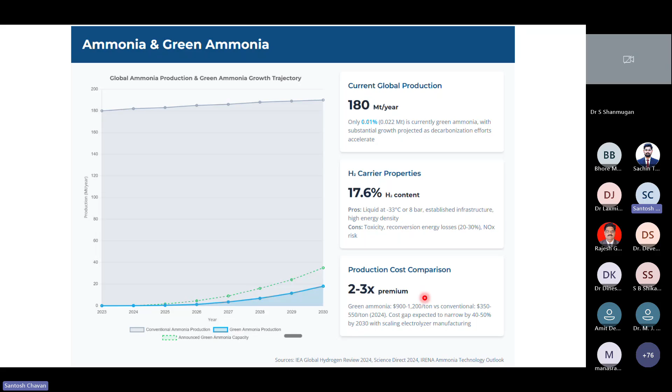So refining and chemical clean hydrogen uses. In refining application, current hydrogen demand is nearly 33 million ton per year, which accounts for 35% of global hydrogen consumption. Key refining processes are hydrotreating, removing sulfur, nitrogen, and metal from petroleum feedstock; hydrocracking, converting heavy hydrocarbons into lighter and higher value products. Then hydrogen intensity, 20 to 80 kg hydrogen per ton of processed crude oil.

Then chemical production and industrial hubs: the chemical sector application has nearly 31 million ton per year and methanol around 12 million ton per year. This involves ammonia production around 180 million ton per year globally. Only 0.01% green, remaining is normal ammonia. Methanol production is 110 million ton per year. Hydrogen intensity is around 0.11 kg of hydrogen per kg of methanol.

So the future e-chemical pathway is CO2 can be used as a feedstock, feedstock to hydrogen storage, then circular carbon: waste plastic gasification with green hydrogen can be utilized. Then industrial hub strategy can be adopted, with demand aggregation, then shared infrastructure. So cross industries can develop a common infrastructure. They can utilize it for multiple applications. Like different countries can combinedly develop a common infrastructure to utilize it.

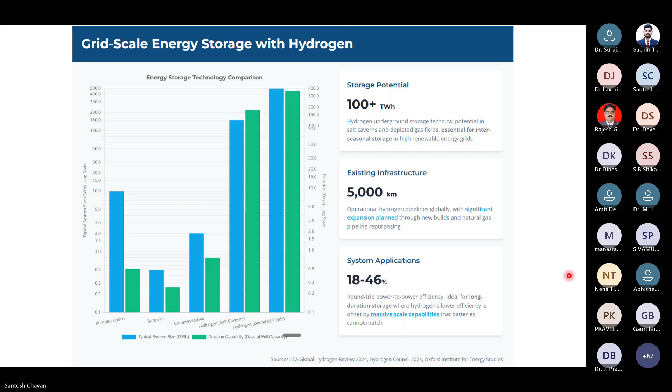System efficiency is around 18 to 46%. Round trip power to power efficiency, ideal for long duration storage. So power to gas and gas to power efficiency cycle. So electricity we are supplying, then electrolysis is happening, water splitting is happening, then it is again utilized in a fuel cell and converted into electricity as an output. So the total efficiency of the complete system is getting reduced.

So energy density is around 0.1 to 0.5 kilowatt-hour per kg. Self discharge rate in a lithium ion battery is 2 to 10% per month. Typical duration is minutes to hours, up to 8 to 12 hours. Ideal for daily cycling, short duration balancing, rapid response to the demand signal, it will respond in milliseconds. Limited seasonal storage capability due to self-discharge, smaller footprint for equivalent short duration capacity.

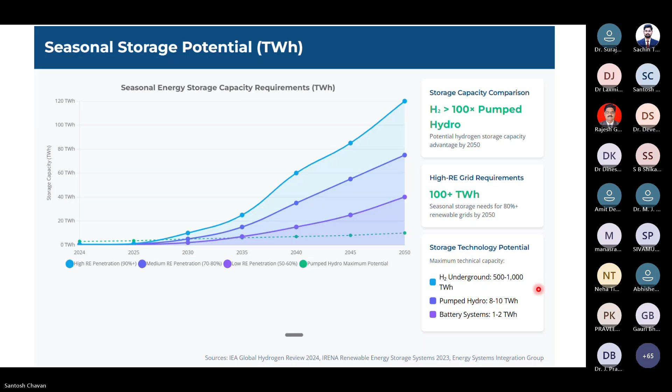And this produced hydrogen can be used in industry like steel, ammonia manufacturing and other chemical industry. Then power, it can be used for power generation like fuel cell, turbines and other things. And this can also be used for transport application. So this is the combination. The major heat source required is from the integrated renewable. Hydrogen turbine operation.

So project case studies. So globally, how projects are planned, how much it is, how much investment is happening.

So Dr. Jatar, whether I am running out of time or is it okay? Sir, you can move fast. That will be better. Okay, okay. Yeah.

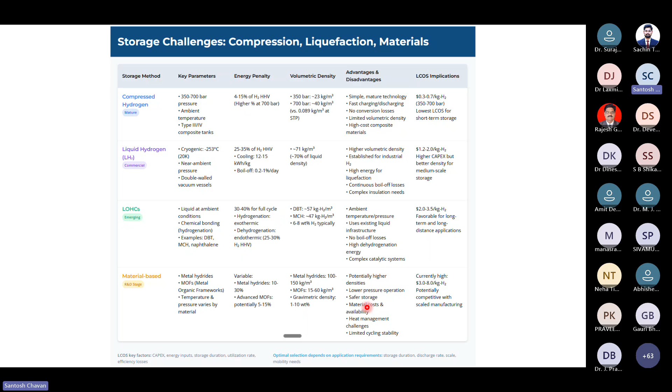So transportation infrastructure and cost. I will just try to move a little bit faster.

So safety standards and regulations, like ISO, TS certification. For safety standard, ISO 15916; operational standard, ISO 19880-1; technical standard, IEC, International Electrotechnical Commission. These are the standards which focus on this parameter. Key requirements are given and which industry it is impacting is related.

So material and hydrogen embrittlement risks. What are the risks involved in this? Mechanism and vulnerability: hydrogen atoms diffuse into the metal lattice, causing reduced ductility, reduced material strength, delayed cracking under sustained load, and accelerated fatigue crack growth. These are the mechanisms of how hydrogen is stored in the metal.

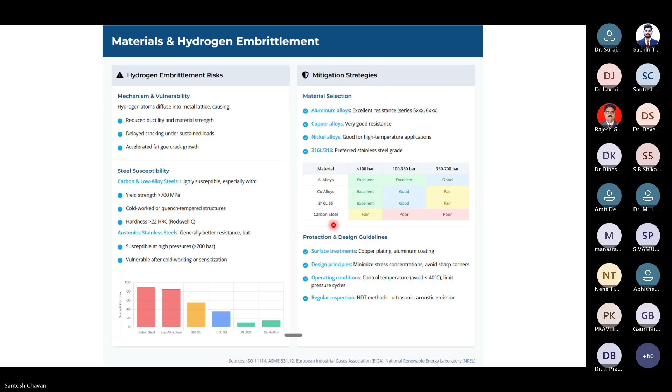So water requirement and sourcing: how much water is required to produce per kg of hydrogen. Theoretically, a minimum of around 9 liters of water is required to produce 1 kg of hydrogen. PEM electrolysis requires around 16 liters of water. Alkaline is slightly higher. SOEC, then with desalination, is highest.

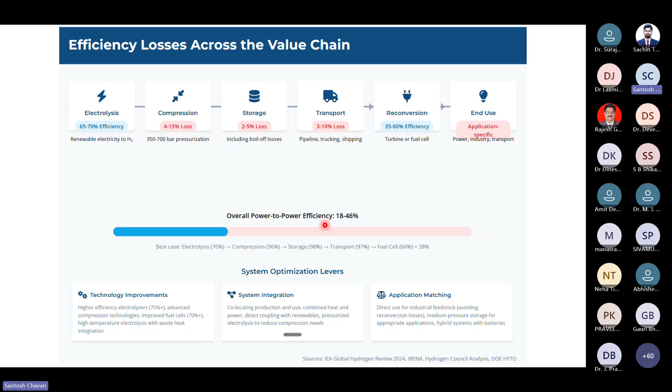So efficiency losses across the value chain: electrolysis is around 65 to 70%, compression 4 to 15%, storage 2 to 5%, transportation 3 to 10%, reconversion 35 to 60%, and end use application specific is around 18 to 46%. It will be around 18% available at the end use application.

So cost roadmap for 2030, 2040, and 2050: how the green hydrogen costs are expected to decline. The efficiency improvement trajectory for PEM electrolyzer efficiency can be improved by 25% by 2050 due to upgradation of technology. SOEC with heat integration can increase efficiency by 40% by saving waste heat energy. System level optimization key efficiency drivers are PEM stack advances, heat recovery and integration, and high pressure operations.

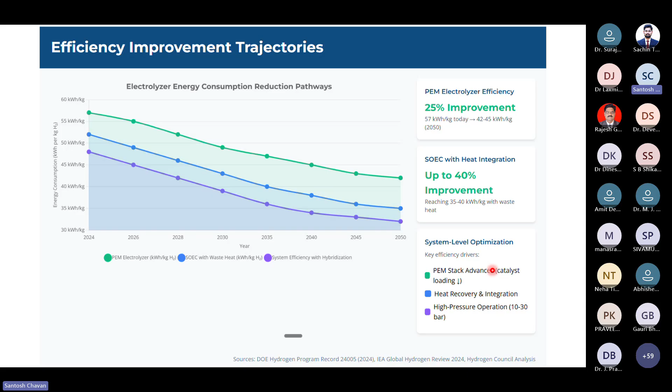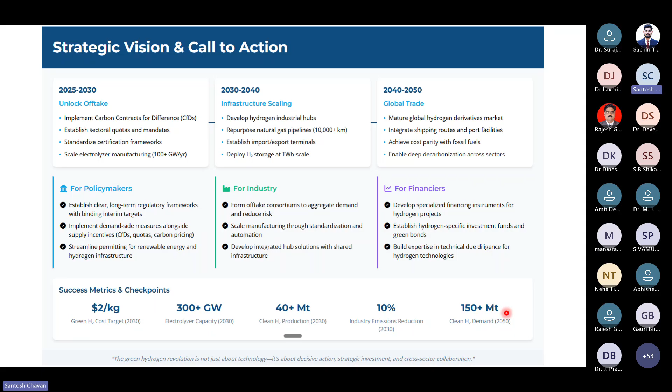So success metrics and checkpoints: our target should be bringing green hydrogen cost to $2 per kg by 2030. This should be our target, along with 300 gigawatts of electrolyzer capacity by 2030, 40 plus million tons of clean hydrogen production, 10% industry emission reduction, and 150 million tons of clean hydrogen demand by 2050.

Thank you for your patience and listening for this almost 1.5 hours.

Yes sir, it was a really great and marathon session. Okay. We have some queries in the chat box. Definitely, yeah, please.

How effective is metal hydride for hydrogen storage, and how soon can we see its use commercially?

Yeah, as I've shown, the technology is underway. Metal hydride storage is still at a very advanced but beginning stage. Because of its conversion efficiency, this technology still needs improvement. So I'd say, not nearly — around the next 5 years at least — we won't be able to get metal hydride storage commercially because of its efficiency.

Okay sir, any question from participants? Hello, yeah, yes sir, yes sir. Am I audible? Yeah yeah, yes yes. Sir, there is one question. My name is Ajay Visabe.